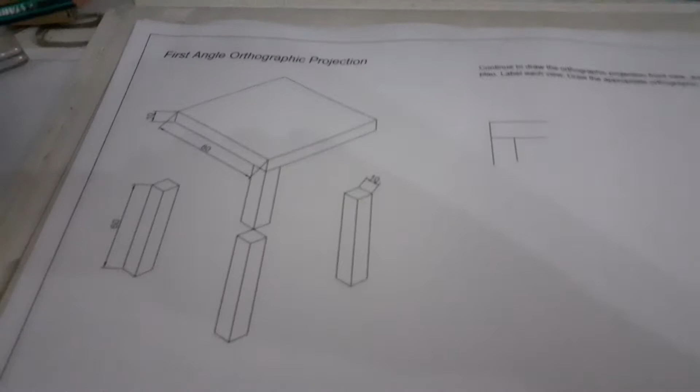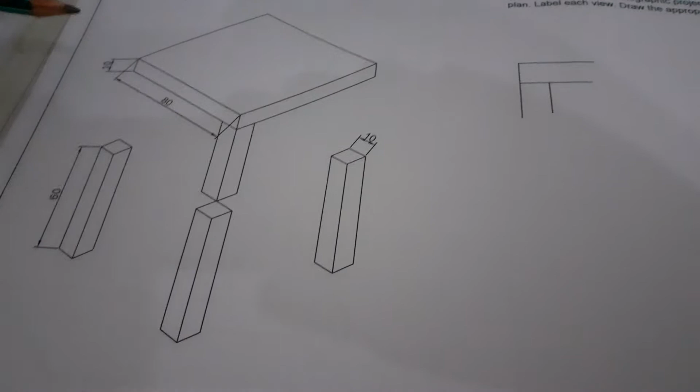So this topic is called assembly drawing, where we basically, as the name suggests, have to assemble the figure, such as this one. Assembly drawing is when you have a shape that's in an exploded view, meaning the parts are separated from each other. You'd have the measurements, but they would be separated.

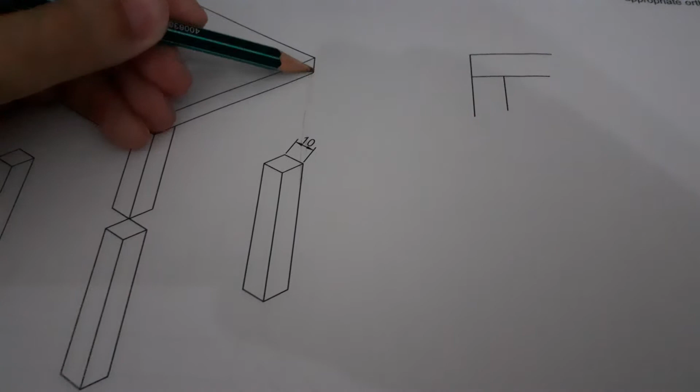With the ruler, the table is pretty obvious how to do it, even with the given starter lines. But let's say I didn't give you starter lines, and you didn't know where the legs were gonna go. You take your set square, line it up with the line, and just see where they have to go.

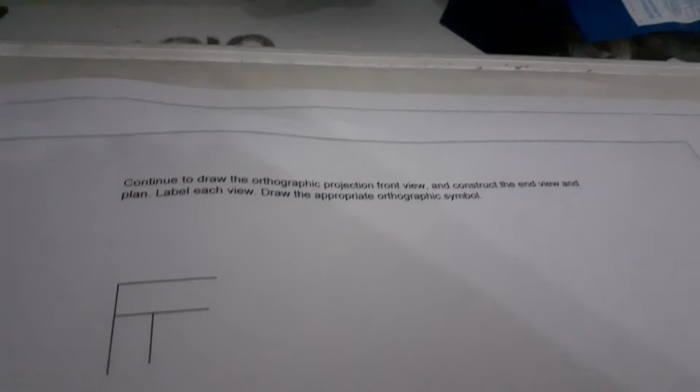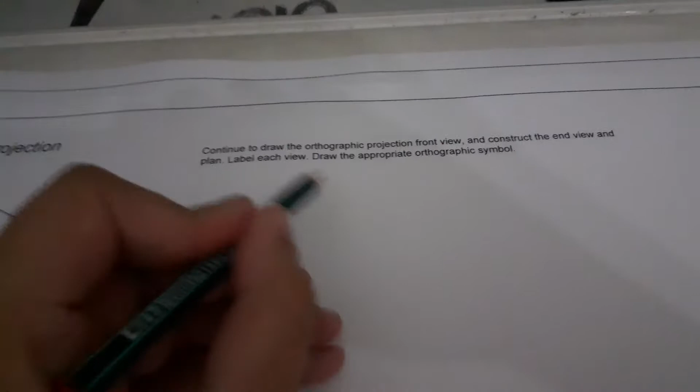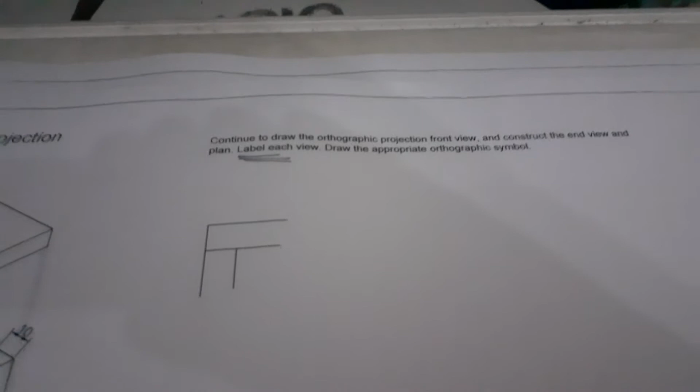Now continue to draw the orthographic projection front view. I've started the front view. Construct the end view and the plan. Label each view, and don't forget to draw the appropriate orthographic symbol. If you've forgotten how to do it, just look it up. The first one is first angle orthographic projection.

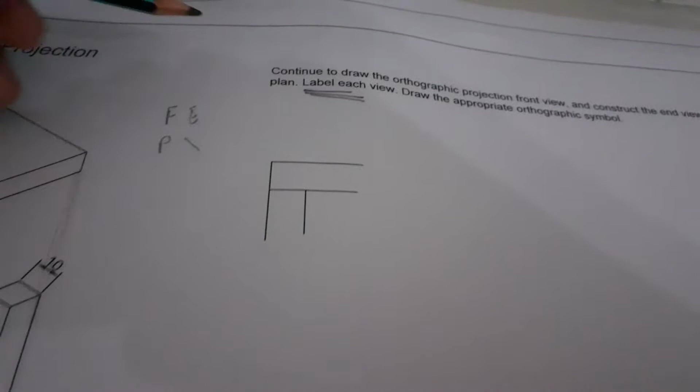You can set up this one as we did last year, F, E, P, just in case you forgot where they go. This is the 45-degree line, don't forget. You start with the front view, move on to the end, then get to the plan. Don't forget the 45-degree line. Measurements can be taken from the exploded view.

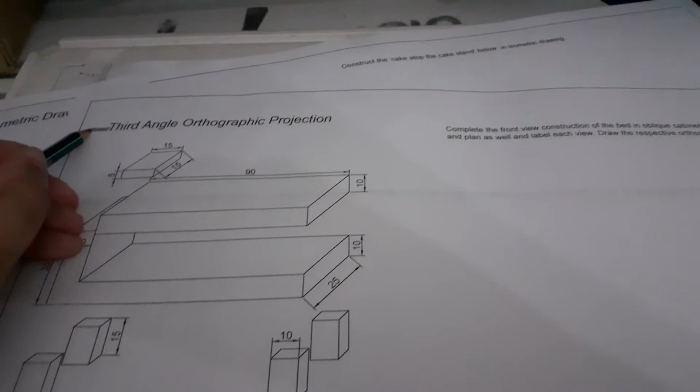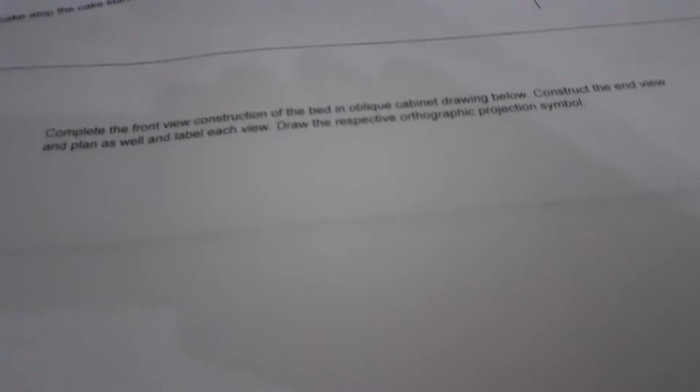Now on the next page, you have the same thing, but this time you have to create a third angle orthographic projection. Remember, this is oblique cabinet drawing below, so you're gonna create it below. With the oblique, don't forget, an oblique drawing is halved.

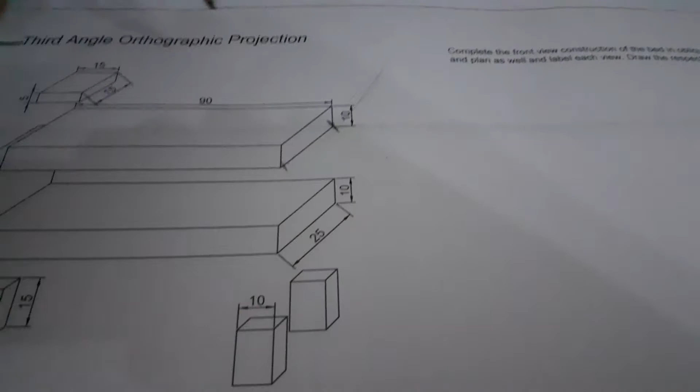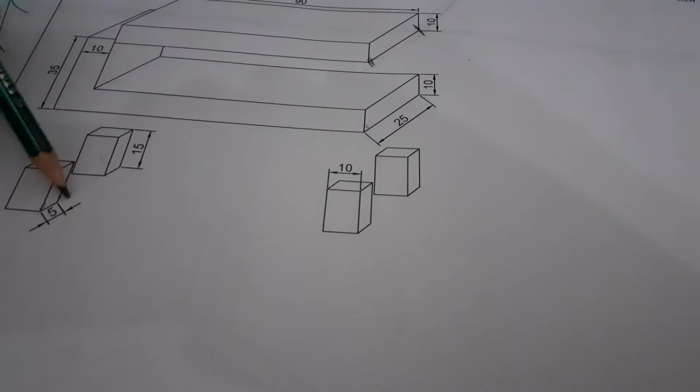So if you're going to do it in orthographic, you need to double it to get the original length. Because when we used to have orthographic to transfer into oblique cabinet, this would be divided by half. So to get back to the original dimensions, you'd have to double it. So instead of 25, it would be 50, and instead of 5, it would be 10. The other dimensions are all over here.

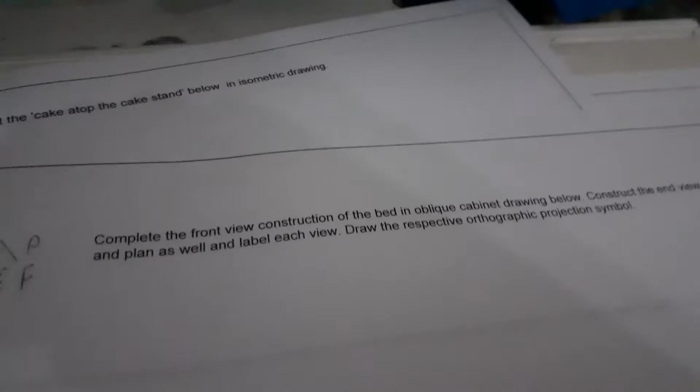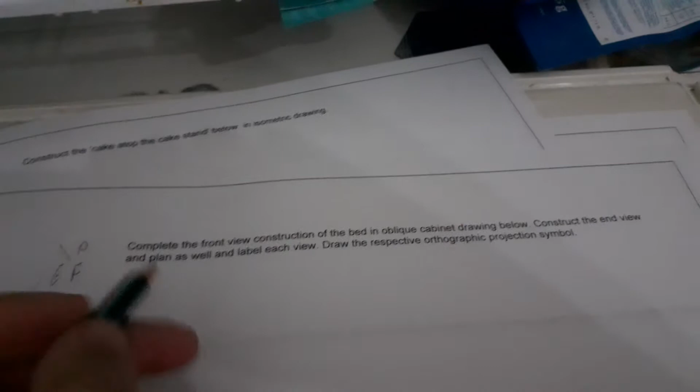Don't forget, third angle orthographic projection - how do we do it? F, E, P, 45. So complete the front view construction of the bed in oblique cabinet drawing below. Construct the end view and plan as well, and once again label each view. Draw the respective orthographic projection symbol.

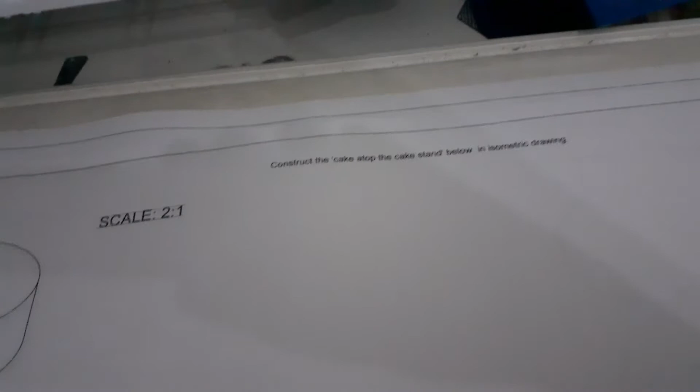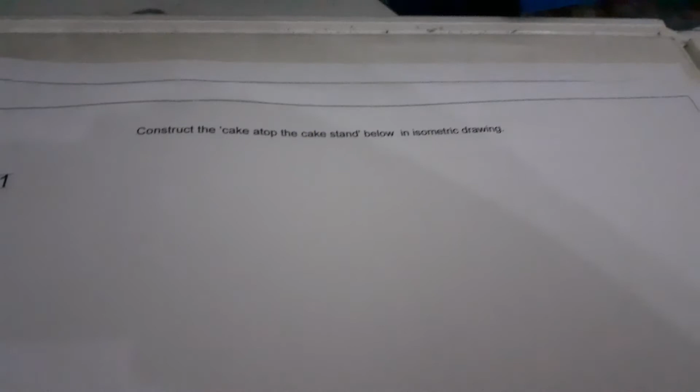Let's see what we have on the next page. On the next page we have an isometric drawing. Isometric, remember, it's 30 by 30. So construct the cake atop the cake stand below in isometric drawing. This is an isometric drawing, and you're gonna recreate it in isometric drawing over here.

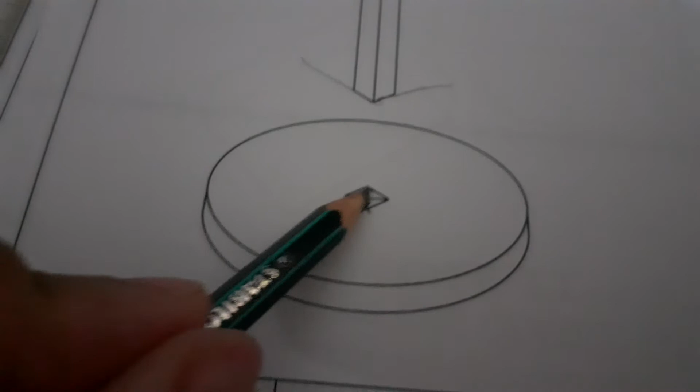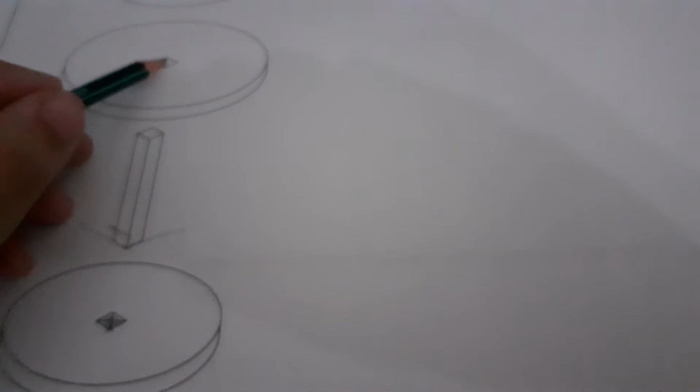But look, X over here and X is over here - so you have the point of significance. This point over here of X would be over here. You're gonna recreate it, draw it, and join it to create the cake stand. Remember, this would be at the bottom, so somewhere here, and this would be at the top, so the length somewhere here. The cake goes atop of it.

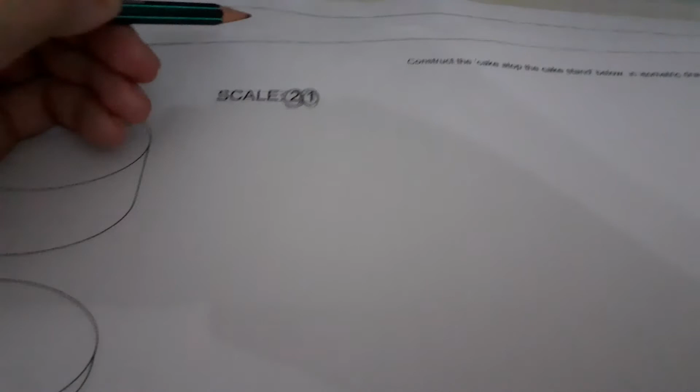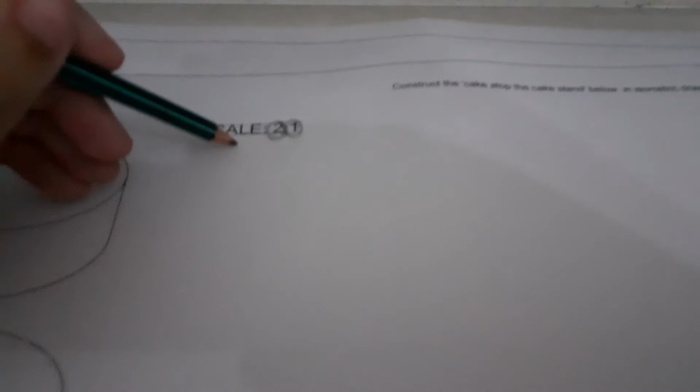Scale 2:1. So what does it mean if I have the first number bigger than the second? It means I have to enlarge it, so I'm gonna double up the measurements. This scale isn't strictly for linear scaling - scale can be used basically in any topic.

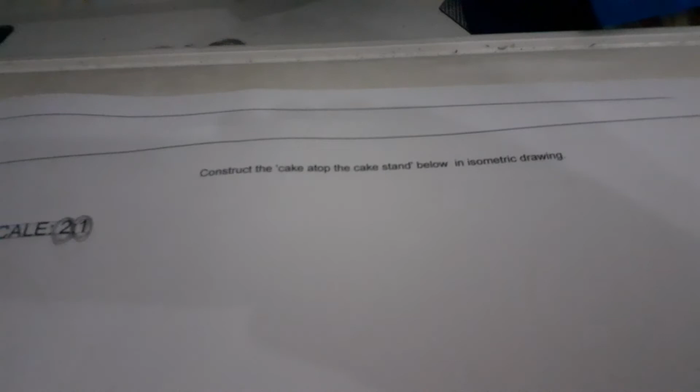So construct the cake atop the cake stand below in isometric drawing. Like I said, you're gonna assemble the parts together, and you're gonna recreate the isometric drawing over here.

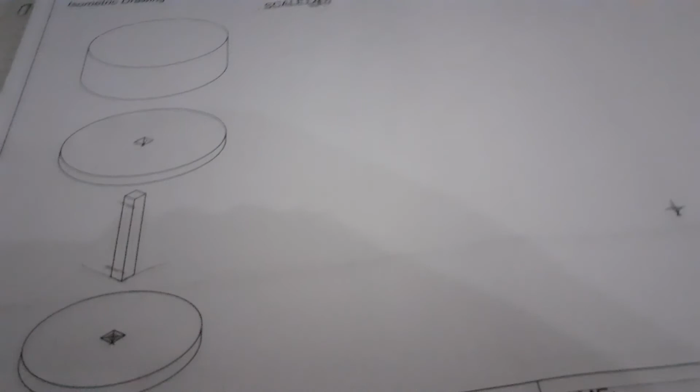Guys, by the way, my advice is always first start with a sketch, because if you get mixed up somewhere in the drawing, you're gonna have to rub it all off. And trust me, it has happened with a lot of overconfident students last year in Form 4, and then they had to rub it all off. There's nothing wrong with creating a sketch - not only nothing wrong, I'll applaud you, because a sketch will help you in so many ways.

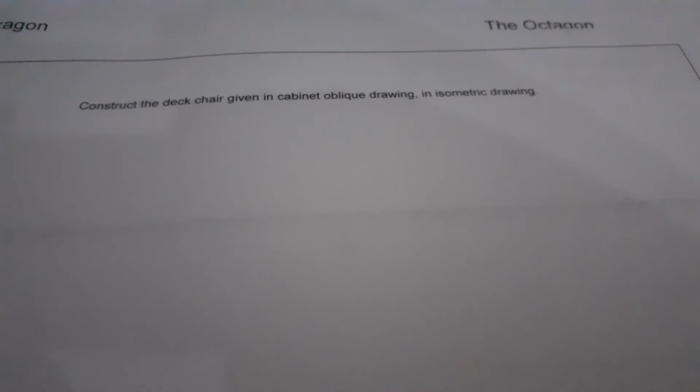Now over here we have a deck chair, and we're gonna create an isometric drawing of the deck chair. Construct the deck chair given in cabinet oblique drawing, in isometric drawing. So this is currently in oblique cabinet drawing, so remember, with cabinet oblique drawing, you're gonna have to double up these sides - you're gonna have to double them up.

You're gonna assemble it, make a sketch, and then you're gonna create it in isometric projection. That's it for this topic.